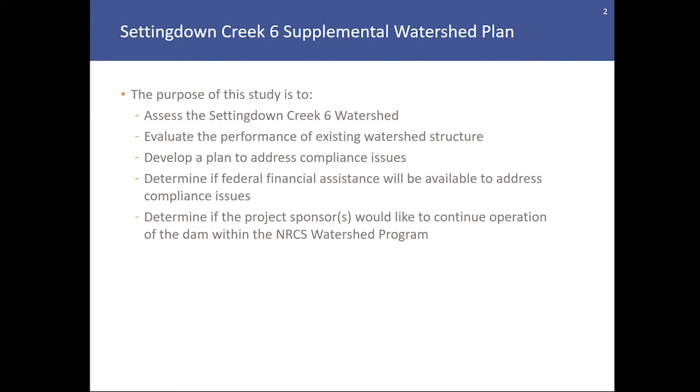The purpose of this study is to assess the Settingdown Creek 6 watershed and evaluate the performance of the dam, to develop a plan to address compliance issues with the dam, determine if federal financial assistance will be available to address compliance issues, and determine if the project sponsor would like to continue operation of the dam within the NRCS watershed program.

The planning study includes a public participation plan. The objective is to inform the public and watershed stakeholders of the planning effort. The planning study requires a series of public meetings.

The first public meeting was held in August 2020. The initial public meeting presentation included a brief history of the NRCS watershed program, a brief history of dam safety, considerations for dam design, operation, and maintenance, an overview of the Settingdown Creek watershed and specific dams included in the planning study, and finished with the opportunity for members of the public to submit questions and comments for the various scoping topics in order to identify project opportunities and concerns.

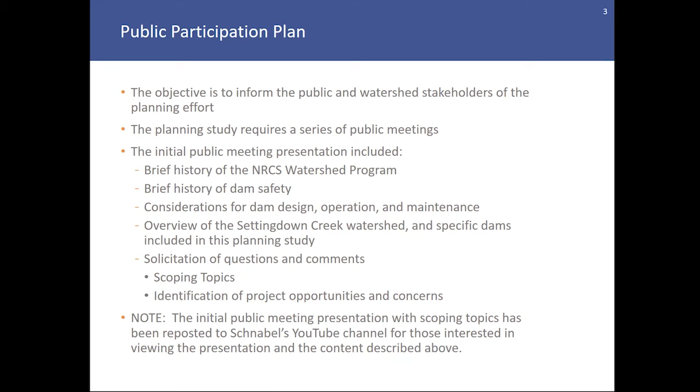This second presentation will discuss the following topics: an overview of the Settingdown Creek watershed, the existing conditions associated with Settingdown Creek Dam No. 6, a discussion of rehabilitation alternatives under consideration for Settingdown Creek Dam No. 6, and the opportunity for members of the public to submit questions and comments regarding the alternatives presented.

The Settingdown Creek watershed is located in northern Forsyth County, Georgia. Settingdown Creek is a tributary of the Etowah River, which flows into the Coosa River near Rome, Georgia. The watershed contains over 34,000 acres of drainage area. The original watershed work plan, prepared in April 1954, provided for the construction of 15 floodwater retarding structures, also known as the Settingdown Creek Dams.

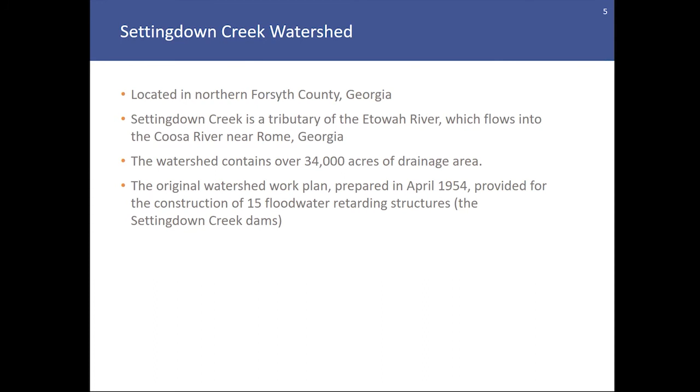This slide presents a map of the Settingdown Creek watershed. The watershed boundary is delineated by the red line. For reference, Georgia 400 or US Highway 19 is located at the east or right side of the map. The upstream portion of the Settingdown Creek watershed is also located at the east end of the map. The Etowah River, for reference, is located near the left or west side of the map. For additional reference, please note the locations of Keith Bridge Road, Georgia Highway 9, Georgia Highway 369, Canton Highway, Georgia Highway 20, and Post Road, all located in northern Forsyth County.

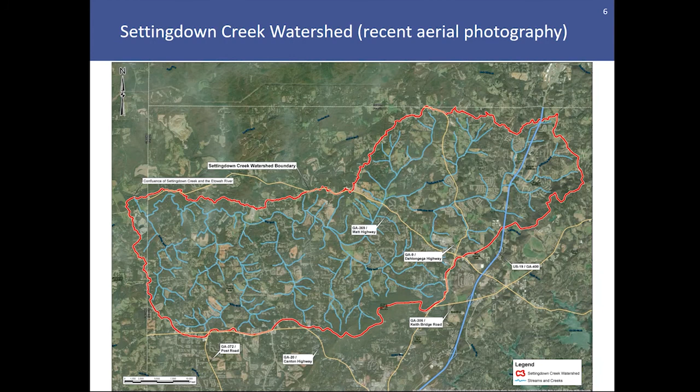As part of the Supplemental Watershed Plan preparation, there are several focal points of analysis and study, including upstream areas to determine flooding and the need for additional storage capacity, downstream areas which could be subject to flooding and/or within the limits of a dam breach zone should the dam fail in a catastrophic manner. Also, as part of the study, is an evaluation of the hydraulic capacity of the existing spillway outlet works for the dam.

This evaluation was performed during several storm events, including large design storm events required by the Georgia Safe Dams program and the NRCS. In addition to the engineering analyses performed to support this study, an evaluation of the economic and social benefits provided by the dam is also being performed. Also, an environmental assessment, including the identification of cultural resources within the project vicinity, is also being performed.

Settingdown Creek Dam number 6 meets Georgia Safe Dams program criteria to be considered a Category 1 high hazard dam. This means that failure or improper operation of the dam would likely result in the loss of human life. The dam needs an operating permit from the Safe Dams program. Previous assessments and studies indicate that this dam does not comply with current SDP rules and requirements.

This dam is not exempt from SDP rules and requirements. One purpose of the Supplemental Watershed Planning Study is to determine if federal assistance will be available to bring the dam into compliance with current dam safety regulations. The Georgia Safe Dams program is fully aware of this dam, its classification or pending classification as a high hazard dam, and that the dam is being studied by the planning team.

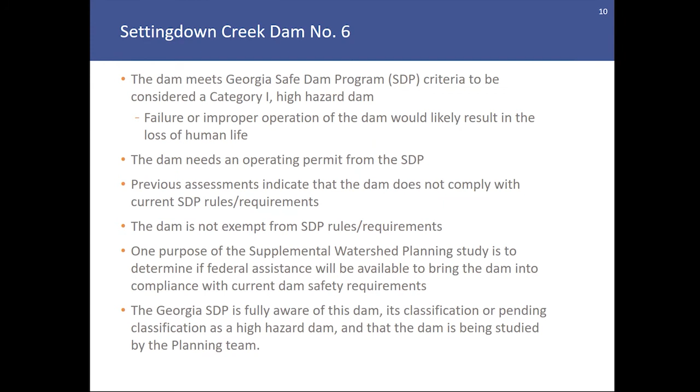Some of the original design features of the dam include the fact that it was not originally designed as a high hazard dam. The primary purpose of the dam is flood mitigation, and an anticipated secondary purpose was sediment accumulation and storage.

The spillways for the dam include a reinforced concrete principal spillway comprised of a riser structure in the lake and a concrete pipe or conduit through the embankment to convey flow from the riser structure through the dam to the outlet channel downstream. Finally, the spillway outlet works include a vegetated earthen auxiliary or emergency spillway that is meant to engage during periods of high rainfall to pass flows around the dam without allowing it to overtop.

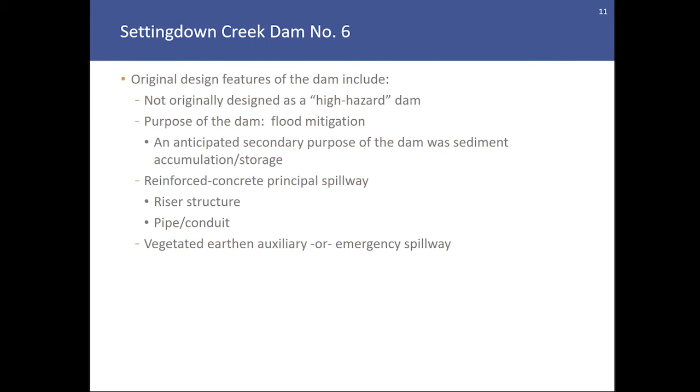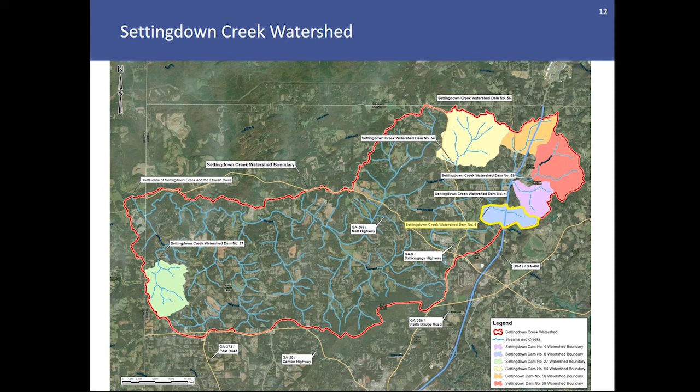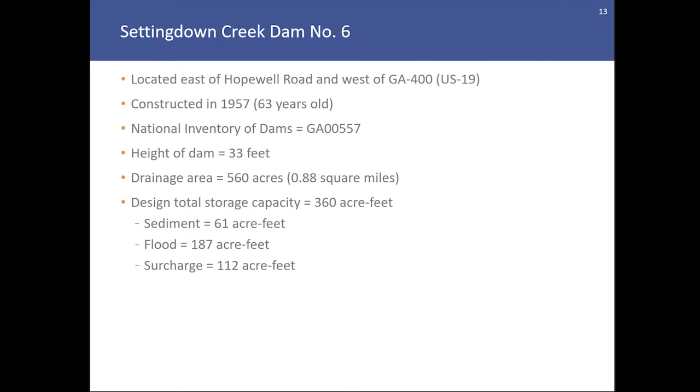Settingdown Creek Dam number 6 is located east of Hopewell Road and west of Georgia 400. Constructed in 1957, the dam is approximately 63 years old. It is 33 feet tall and has a drainage area of 0.88 square miles. The design storage capacity of the dam is 360 acre-feet, with considerations for storing sediment, flooding, and surcharge above the auxiliary spillway elevation.

This 1963 aerial photo presents the dam shortly after its construction and impoundment of the lake upstream of it. As you can see, there are lots of agricultural interests around the dam at this time and not a tremendous amount of development.

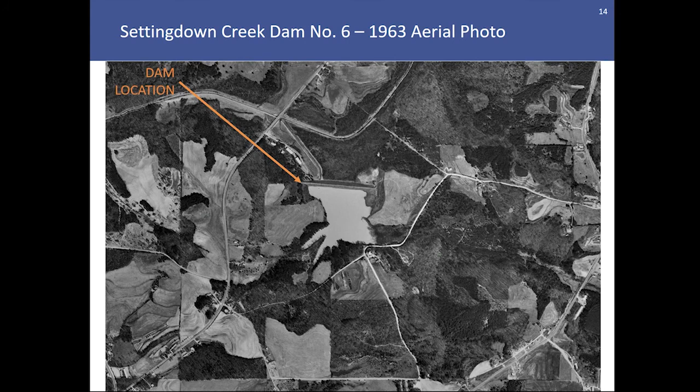Over the past decades, changes in the watershed, including development, have occurred around the dam. This current aerial photo shows the location of some residential subdivisions and commercial development in and around the watershed for dam number 6.

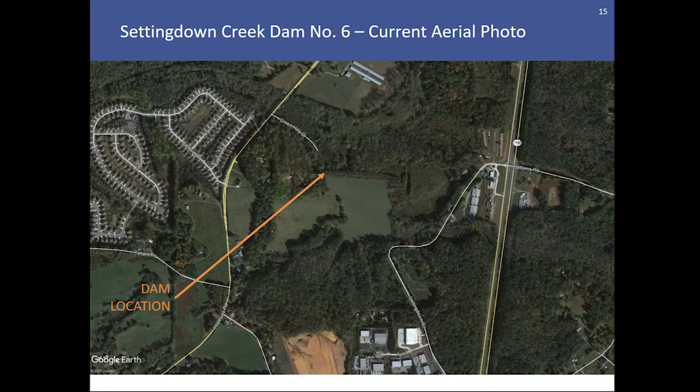This summer, to support the planning effort, a topographic survey of the dam was performed. The survey was conducted to determine the elevations of the dam crest and critical spillway outlet works.

An aerial photo to support the development of the topographic survey was taken this summer after the dam was cleared of trees and inappropriate vegetation by the sponsor. This view of the dam is oriented such that the lake is at the bottom of the page and downstream areas are at the top. Left and right with regard to these directions is referenced in this manner.

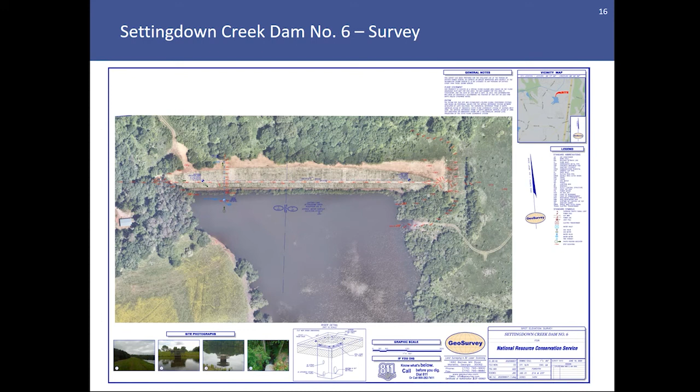This is an existing site plan using GIS topographic contour information to display the dam and spillways. Note that the location of the existing principal spillway, riser, and pipe is near the left end of the dam. The existing auxiliary spillway is located at the right end of the dam. There's a relatively wide floodplain downstream of the dam as the tributary enters into Settingdown Creek.

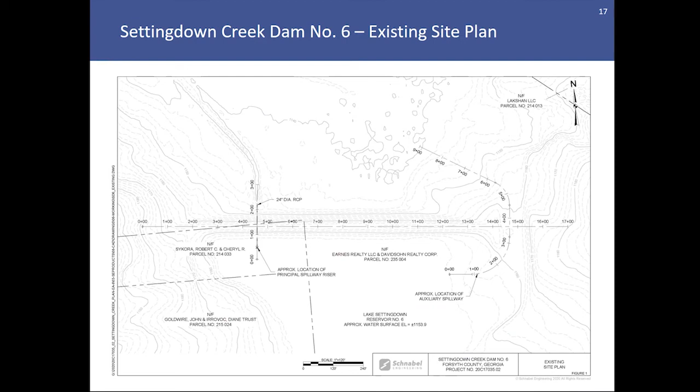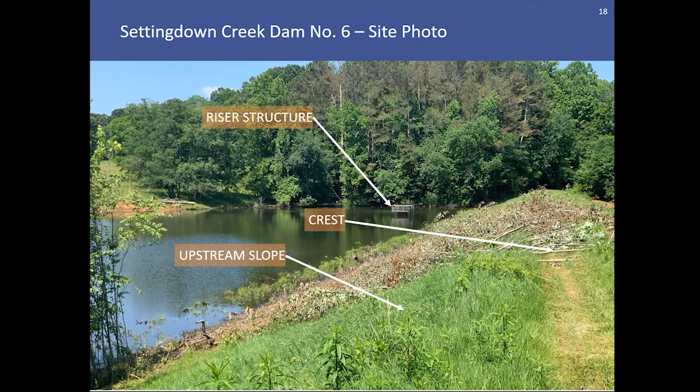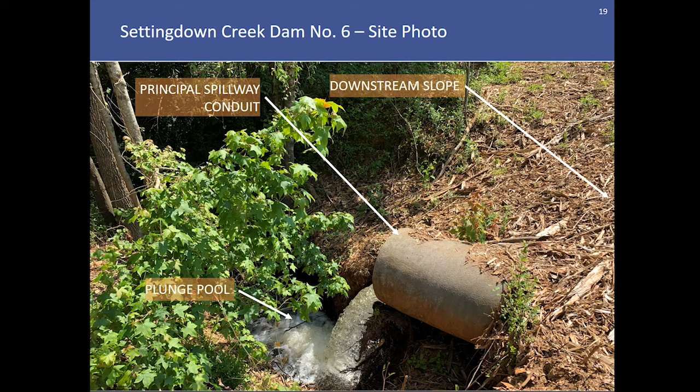In addition to the engineering analyses performed to support this planning effort, an environmental assessment of the dam is being performed. This summer, an environmental survey of the dam was conducted. The fieldwork determined that no protected species were found during the survey.

However, some invasive species, predominantly Chinese privet, were located in a couple of areas upstream and downstream of the dam. The Aquatic Resource Survey map at the left side of this slide indicates the location of streams, wetlands, open water, and invasive species observed in the vicinity of the dam.

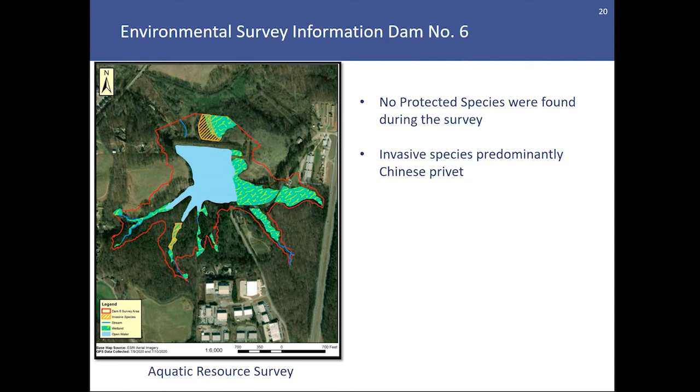Also, a Phase 1 Cultural Resources Survey was performed. The survey involved a literature review and field activities, including shovel tests. During the field activities, no archaeological resources were identified or recorded. The dam, on the order of 63 years old, is the only historic resource, but it is not eligible for the National Register of Historic Places. The Cultural Resources team recommends that no additional cultural resource work be performed for this structure.

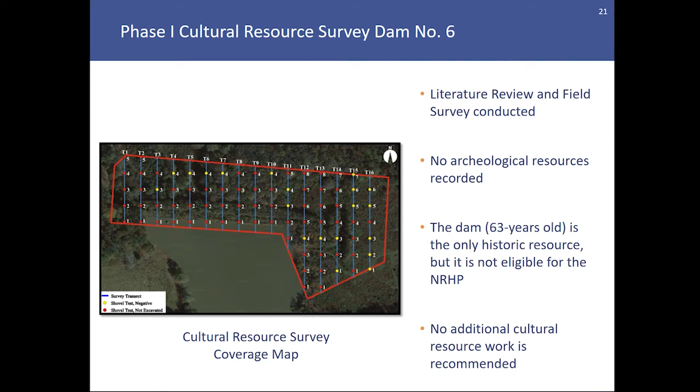As part of the planning effort, a dam breach analysis was performed for the dam. This map indicates the location of the inundation zone downstream of the dam were the dam to fail in a catastrophic manner.

To perform the dam breach analysis, the planning team utilized a sunny day breach scenario, assuming that water would be at the top of the dam and the dam would fail in that manner. The red houses indicated on the inundation map show the locations of potential structures or hazards that would be impacted if the dam were to fail in this manner.

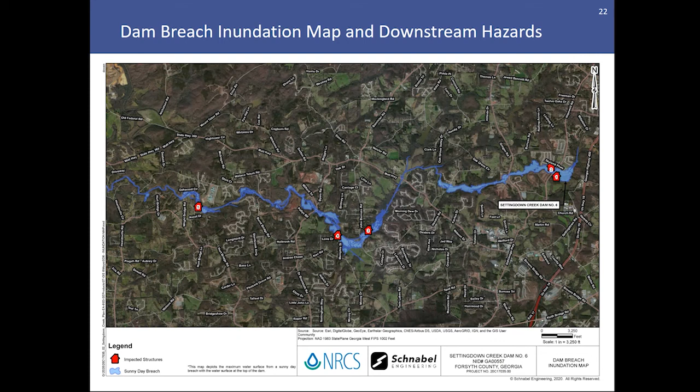This slide presents a downstream flood analysis map of the upper portion of the Settingdown Creek Watershed. Note the location of Settingdown Creek Dam No. 6, as well as the locations of other dams in the watershed. The dams work together to provide flood benefits to downstream areas along Settingdown Creek.

This map shows the limits of inundation associated with both the 100-year and 500-year storm events, as well as the locations of structures that may be impacted during these events. A downstream flood analysis is important to the planning study because the dams currently provide flood benefits to several areas downstream of the dams. Modification to the dams, their spillways, or removal of the dams would impact the amount of flood benefits currently provided by those dams.

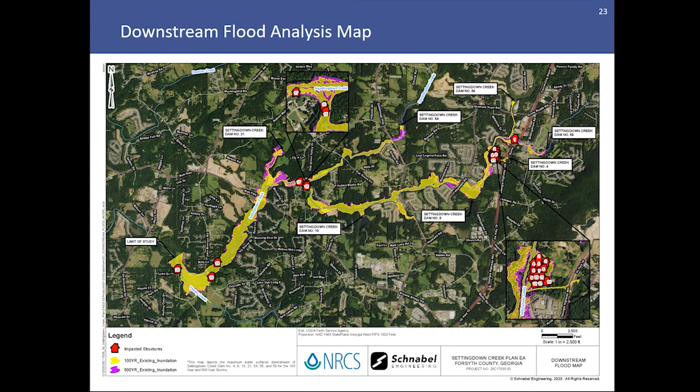This slide presents an upstream flood limits map of the dam. The planning team, using information about the dam, its storage volume, and its spillway outlet works, modeled several storm events and passed those storm events through the dam and spillway outlet works.

This map indicates the maximum water surface elevations for 4 storm events that were studied, including the 100 and 500-year storms, the Safe Dams Program design storm, which is 1/3 of the PMP, and the NRCS design storm, which is the freeboard hydrograph, or 100% of the PMP, or probable maximum precipitation.

In addition to the limits of the storm inundation upstream of the dam, the normal pool elevation of the lake, the auxiliary spillway control section elevation, and the dam crest elevation are also indicated on this map. Note that there are no structures below the top of dam. However, during the freeboard hydrograph, structure 1, which is a cell phone tower, is slightly impacted by flooding upstream of the dam.

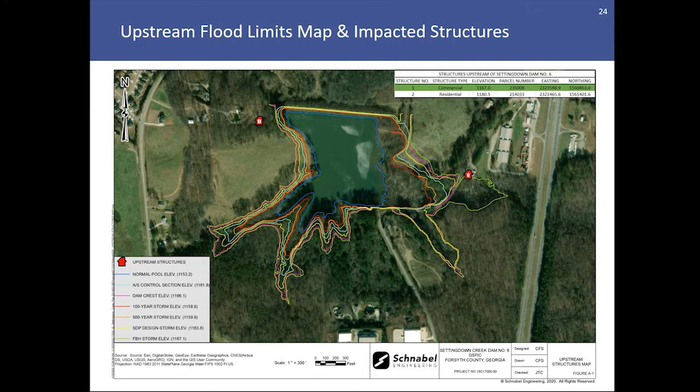Existing dam deficiencies: the dam was recently cleared during the summer of 2020. Prior to its clearing, the dam had overgrown with trees and inappropriate vegetation.

An underwater inspection of the riser structure concluded that portions of the slide gate assembly are worn or covered in marine growth. The commercial divers that performed this inspection noted that the gate was covered by accumulated sediment and was not completely accessible. Portions of the riser structure concrete are cracked and/or spalling.

A CCTV inspection of the principal spillway conduit interior is pending, which will be used to evaluate the condition of that pipe.

Regarding existing hydraulic deficiencies, previous studies indicated that the dam did not meet Safe Dams Program criteria. An enhanced analysis of this dam, including an evaluation of the earthen auxiliary spillway channel, determined that the existing dam is capable of safely storing and passing the Safe Dams Program design storm event with adequate freeboard. This means that little hydraulic improvement to the dam is required to meet Safe Dams Program criteria.

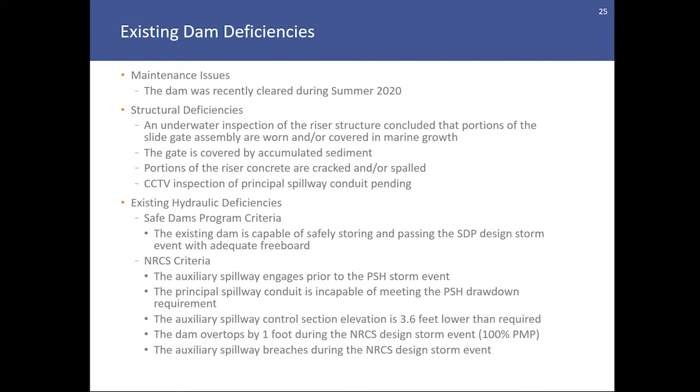Regarding NRCS criteria, the auxiliary spillway engages prior to the PSH storm event. The principal spillway hydrograph is the PSH storm event. The principal spillway conduit is not capable of meeting the PSH drawdown requirement, and the auxiliary spillway control section is 3.6 feet lower than is required by NRCS standards. During the design storm event, the dam overtops by 1 foot and the earthen auxiliary spillway channel breaches.

Using NRCS planning techniques, several rehabilitation alternatives have been developed and are being evaluated and considered by the planning team. One of the alternatives that requires study is the future without project or no action alternative. This alternative assumes that federal financing will not be available to rehabilitate the dam. Therefore, funding to rehabilitate the dam to Georgia Safe Dams Program criteria standards would come from state or local resources.

Other alternatives that are being considered include decommissioning the dam, which would involve removing a portion or the entirety of the earthen embankment. This alternative would also involve stabilizing the excavated channel and resulting lake bed. It could require floodproofing and/or relocation of downstream hazards, given that the dam currently provides flood benefits to downstream areas.

Several structural rehabilitation alternatives are also being considered. These alternatives would meet NRCS design storm criteria and also involve improvements to the embankment and principal spillway systems. In most cases, the auxiliary spillway would need to be widened or raised to meet the larger design storm criteria associated with the NRCS design storm.

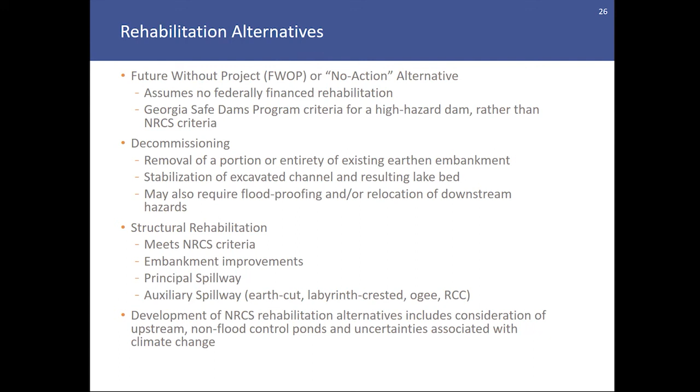The development of NRCS rehabilitation alternatives includes consideration of upstream non-flood controlled ponds, as well as uncertainties with rainfall events over the next 50 to 100 years associated with climate change.

The first alternative we will discuss is the federal without-project, or no action, alternative. As stated previously, Settingdown Creek Dam No. 6 is currently capable of safely storing and passing the Georgia Safe Dams Program design storm, which is 1/3 of the PMP. However, several components, namely the principal spillway, are aging and require replacement.

This alternative would include regrading the upstream and downstream slopes of the dam to a 3-to-1 slope to improve maintenance, and construction of a riprap-lined wave berm along the upstream shoreline to reduce wave action erosion along the embankment. A new principal spillway would be constructed, including a riser structure and a new conduit through the dam, with a riprap-lined plunge pool at the downstream end. Based on the current configuration of the auxiliary spillway, no modifications are necessary to pass the Georgia Safe Dams Program design storm event.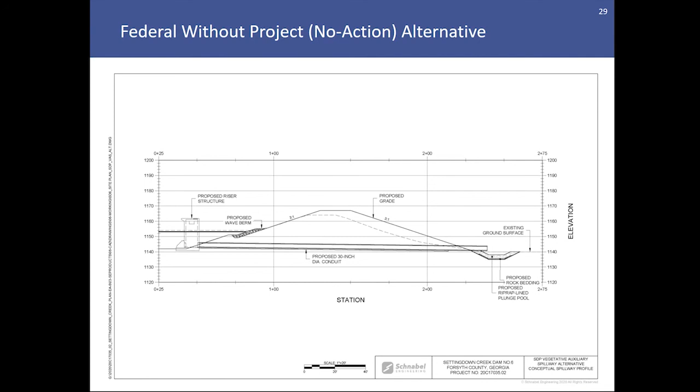An NRCS alternative that was considered was the use of the existing vegetated auxiliary spillway. This alternative was considered and determined to be infeasible due to the nature of the modifications to the vegetated auxiliary spillway necessary to meet NRCS requirements. This means that based on NRCS requirements, the vegetated auxiliary spillway would need to be raised or widened an excessive amount to meet the requirements of the NRCS design storm event.

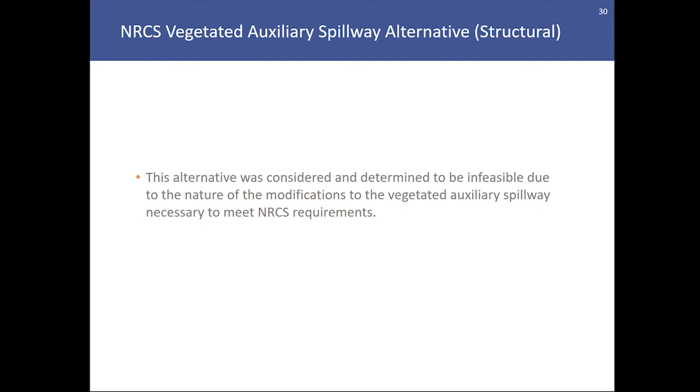A decommissioning alternative is also being considered by the planning team. This alternative would involve reconfiguring the existing structure so that it would no longer be classified as a dam. The process is more involved than simply breaching the dam. Decommissioning would involve removal of most or all of the existing dam, reconnecting the grade of the original floodplain, stabilizing the resulting lake bed with permanent vegetation, and stabilizing the primary channel through the footprint of the old dam with riprap. While decommissioning would improve flooding upstream of the dam, the downstream flood benefits provided by the dam would be lessened.

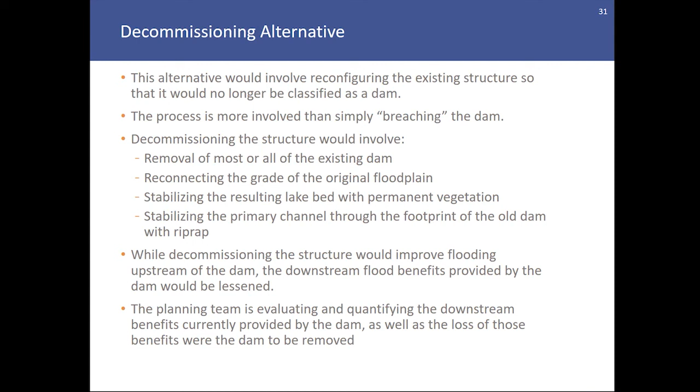The planning team is evaluating and quantifying the downstream benefits currently provided by the dam, as well as the loss of those benefits were the dam to be removed.

This conceptual site plan indicates removal of the dam and reconnection of the floodplain. Note that the original outlet channel through the footprint of the dam would be lined with riprap, and the existing principal spillway system would be removed if this alternative were selected.

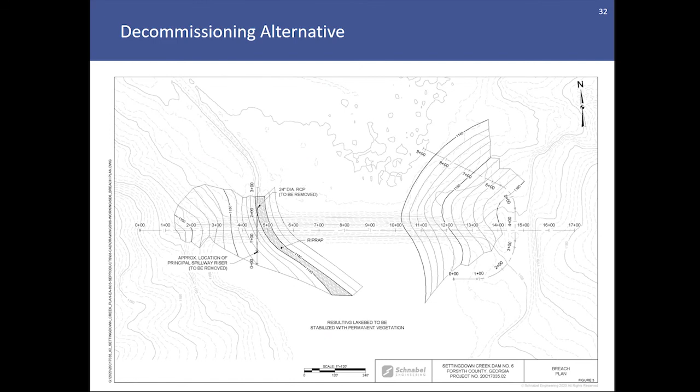This slide includes a couple of profile views along the dam baseline and the main creek channel downstream of the dam were the dam to be removed.

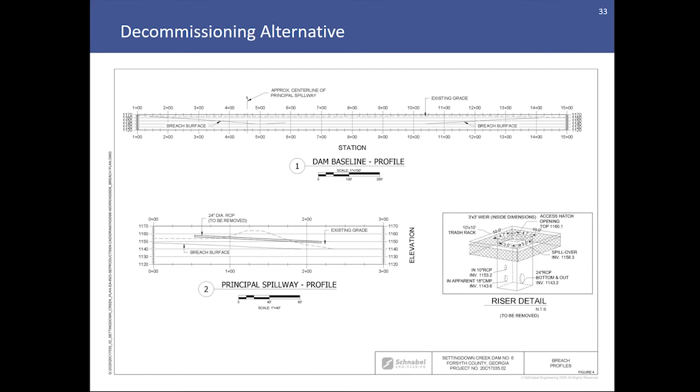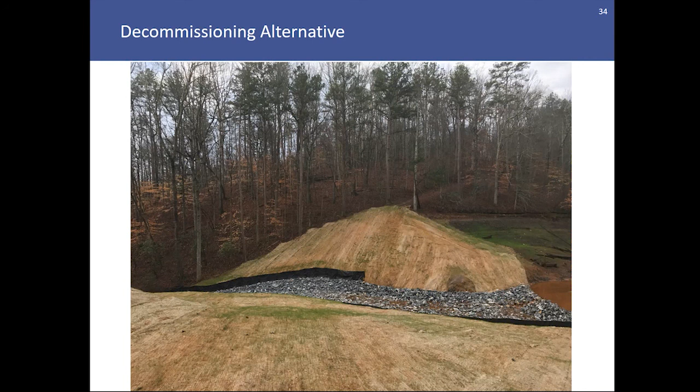We've included a couple of photographs with examples of what a decommissioning alternative may look like. Note that the dam has been removed; the majority of the embankment has been removed from this dam. The disturbed areas have been revegetated with turf grass, and the primary outlet channel through the dam has been stabilized using riprap. This riprap-lined channel would flow on a consistent basis, and water levels through this channel would increase in the event storm events were to occur upstream of the dam or within the watershed of the dam.

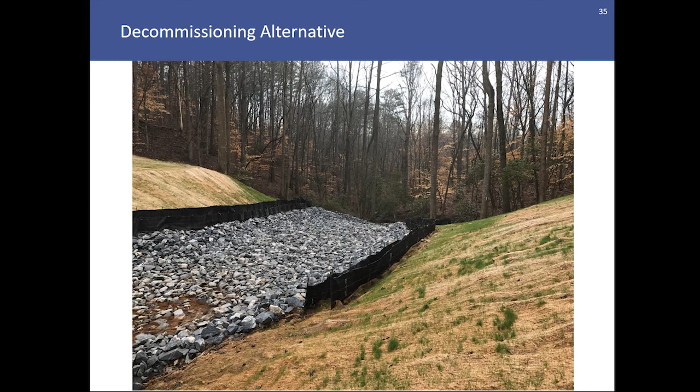The first NRCS structural alternative we will discuss is a labyrinth crested spillway alternative. This alternative would involve raising the crest of the dam to the current maximum water surface elevation associated with the design storm, which is 100% of the PMP.

Embankment rehabilitation would also include regrading the upstream and downstream slopes to a 3-to-1 uniform grade, constructing a riprap-lined wave berm along the upstream shoreline of the dam, and closing off the existing vegetated auxiliary spillway with fill up to the top of dam elevation. A new principal spillway would be constructed and the existing principal spillway would be decommissioned.

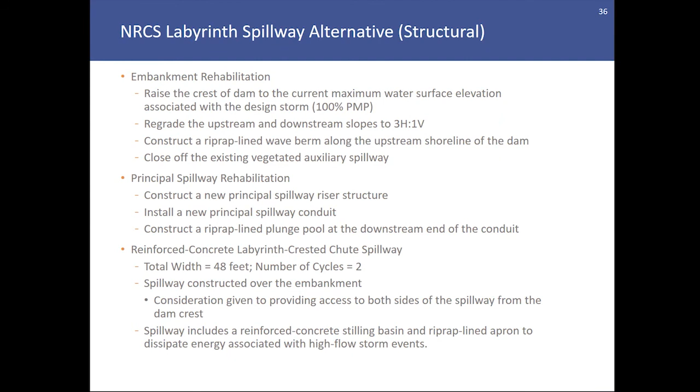The auxiliary spillway in this alternative would be a reinforced concrete labyrinth crested spillway with a total width of 48 feet, consisting of 2 equal cycles 24 feet wide. The spillway would be constructed over the dam embankment and would separate one side of the crest of dam from the other, so consideration would be given to providing access to both sides of the spillway from the crest. The spillway also includes a reinforced concrete stilling basin and riprap-lined apron to dissipate energy associated with high flow storm events.

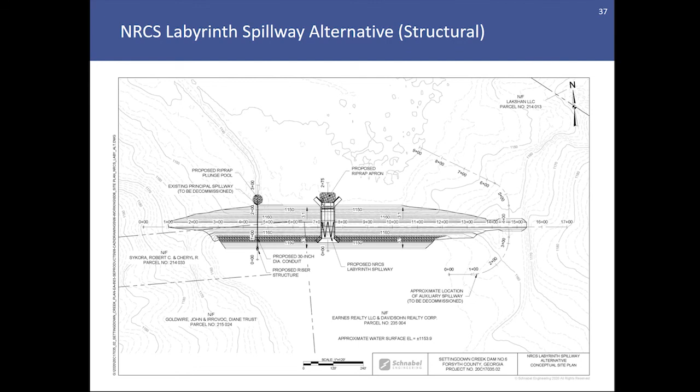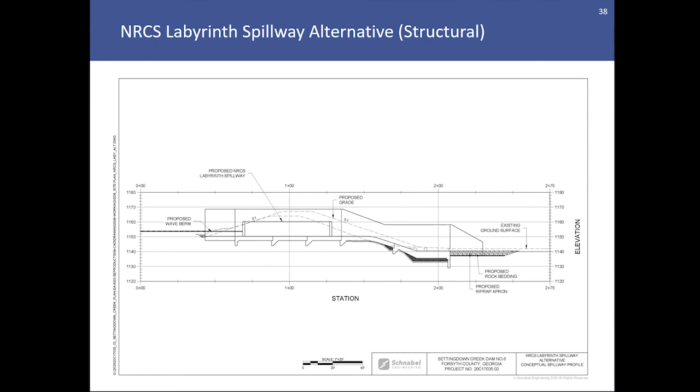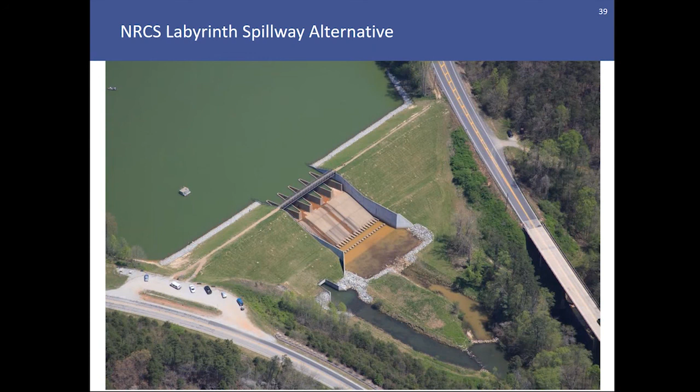The next couple of photographs present examples of labyrinth crested spillways constructed over existing earthen embankments. The first photograph shows an aerial view of a dam with a pedestrian bridge over the top to provide access from one side of the crest to the other. This photograph also does a good job of illustrating how the outlet channel from the auxiliary spillway would reconnect to the downstream floodplain and original stream channel.

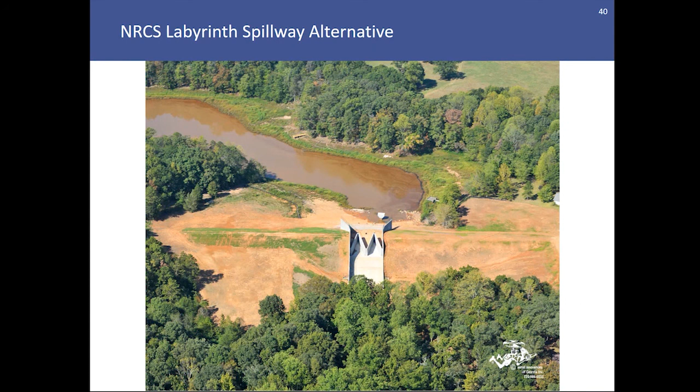The final NRCS structural alternative that we will discuss is a roller compacted concrete stepped spillway alternative. The dam would have similar embankment and principal spillway rehabilitations as the labyrinth crested spillway. The major difference would be that the auxiliary spillway would consist of a broad crested roller compacted concrete stepped spillway. The total width of such a spillway would need to be on the order of 160 feet wide, and the RCC steps would have a height of 1 foot.

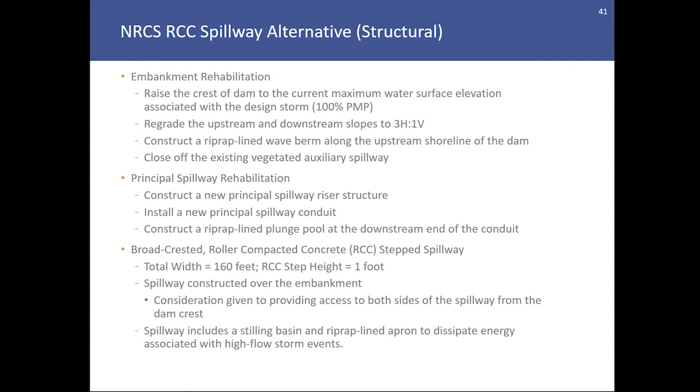The spillway would be constructed over the embankment similar to the labyrinth, with consideration given to providing access to both sides of the spillway from the dam crest. A stilling basin and riprap-lined apron would also be constructed downstream of the stepped spillway.

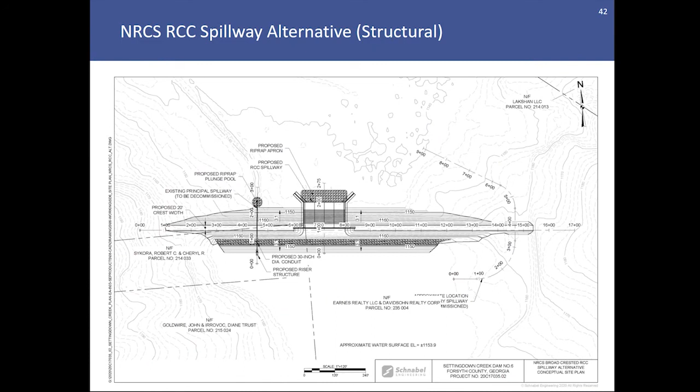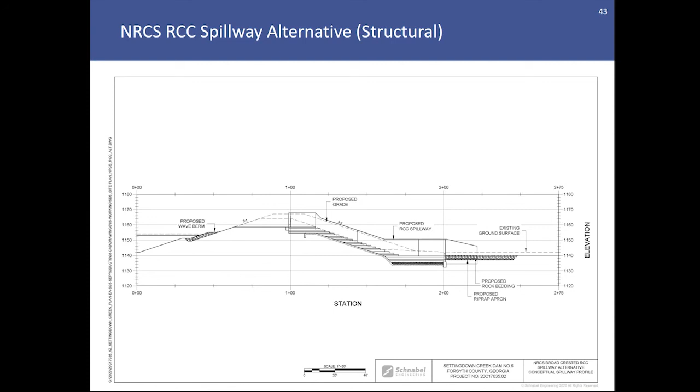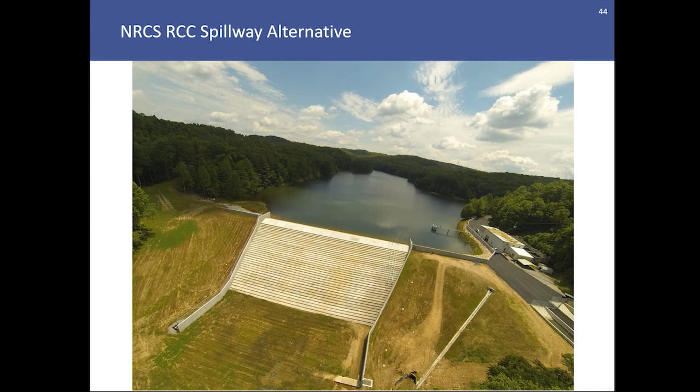The next couple of photographs show examples of RCC step spillways. This RCC step spillway is constructed over an embankment, and the stilling basin downstream of the steps has been filled with topsoil and grass. Since these spillways would typically engage during storm events greater than the 100-year storm event, some dam owners elect to fill in portions of the spillway with topsoil and grass to improve appearance of the dams and maintenance.

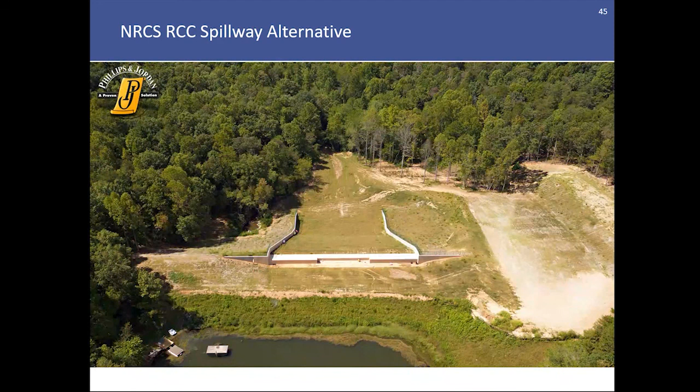Here's another example of an RCC step spillway over a dam where topsoil and grass have been placed over the steps and the stilling basin of the spillway.

This particular spillway has an ogee crest, which is a rounded crest to improve the hydraulic performance of a straight weir. This photograph shows a good view of the rounded top of the ogee crest.

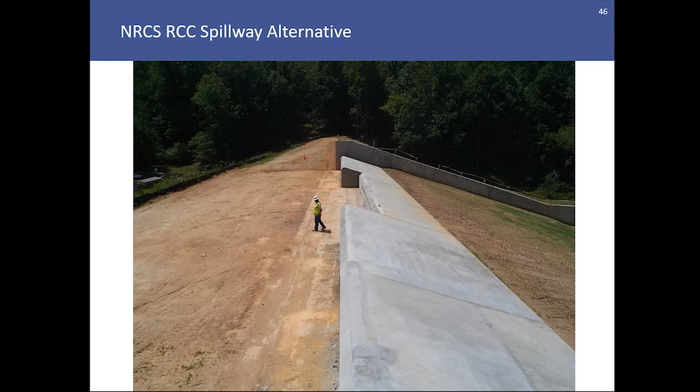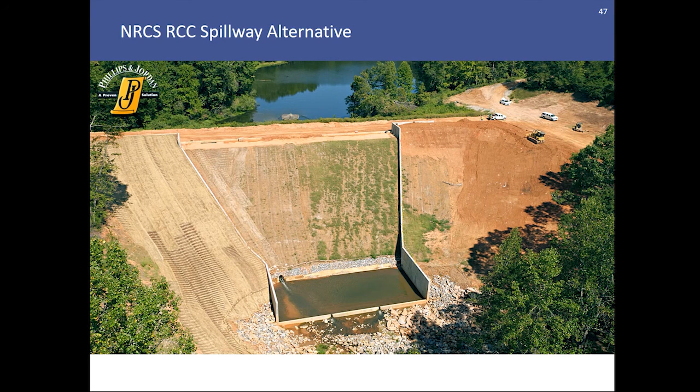That concludes our presentation of rehabilitation alternatives being considered by the planning team at this time.